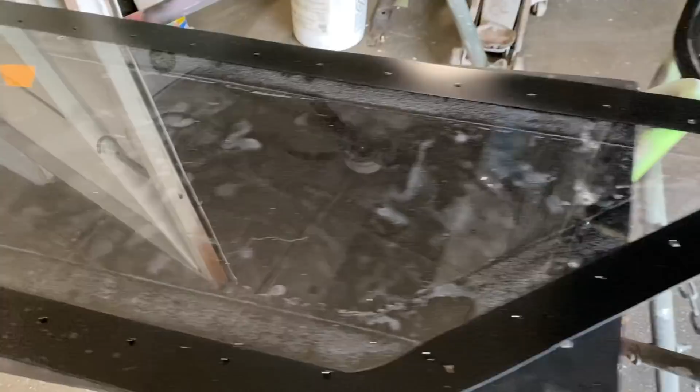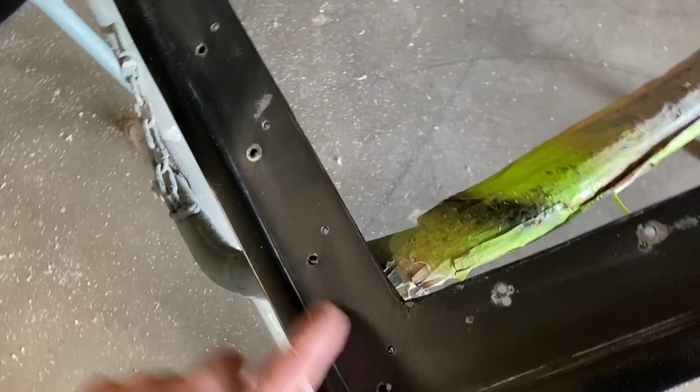Check it out. Last time you saw these doors, I had the glass in it. These were the ones in there down below, and you can see they were painted, so we had some plexiglass. I spent the other night taking all these out - basically they just screw right into the door. So we unscrewed them, got the new plexiglass that's nice and clear, molded it to the door, got it to fit perfectly - well, semi-perfect. It's not exactly the same, but that's okay. You can see the ends down here, they go out, and this one right here is just going to stop.

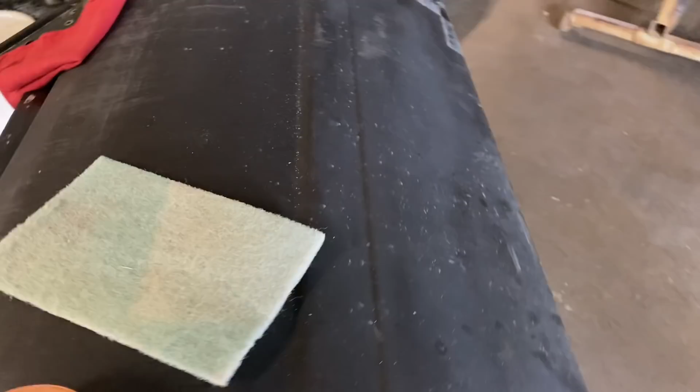These doors used to have a mirror on them at some point, it looks like. So we may end up putting a mirror back on it at some point, or either filling these in at a later time. But it is what it is - it's okay, not too bad.

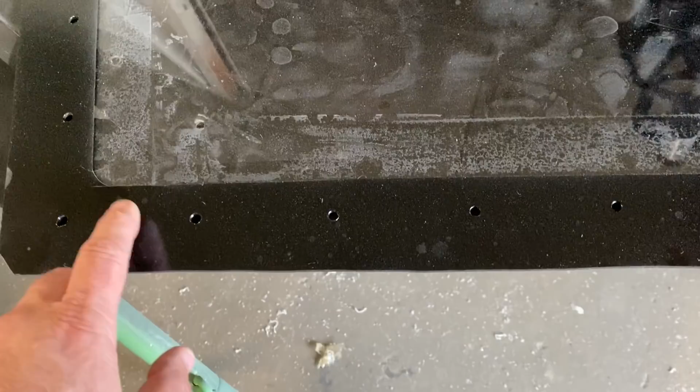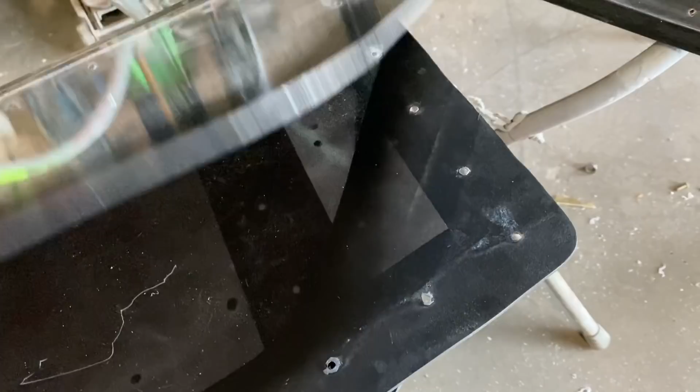So now today we're going to stick these windows in the doors. All we did on the plexiglass is mark it off - I had never done this before. This is the inside edge, so we marked off the inside, taped it up, put some paper on it, and spray painted the inside of it black. So when it goes in the car, you can see on this side it's nice and shiny, and it should hold up pretty good. My taping skills are not the best, but it'll look okay. So let's stick these things in the car and see how it turns out.

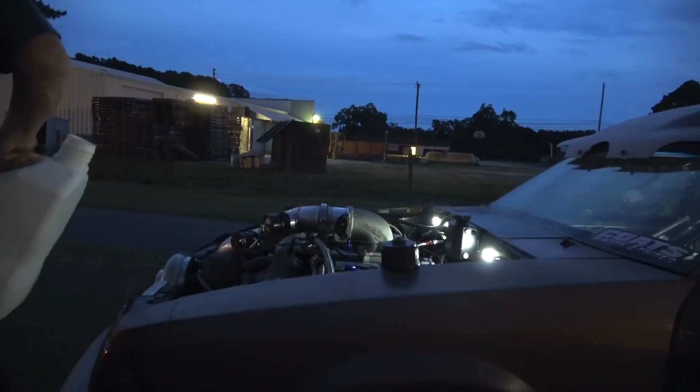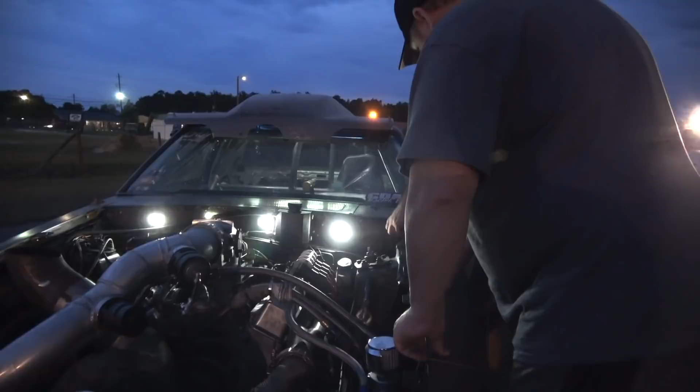Beat that lightning and that rain. It's gonna be a miracle. It's all right, we're here. It says we got about an hour according to AccuWeather - I don't know if that's accurate.

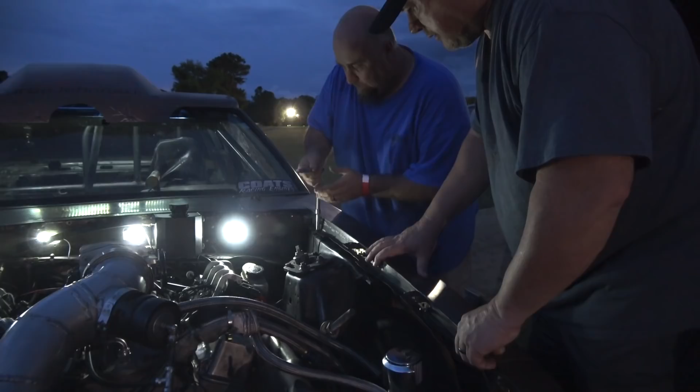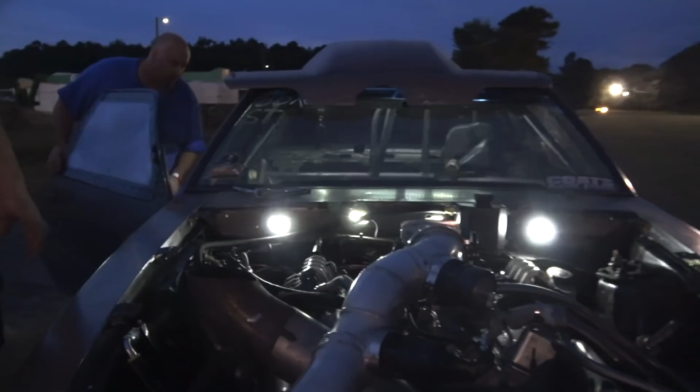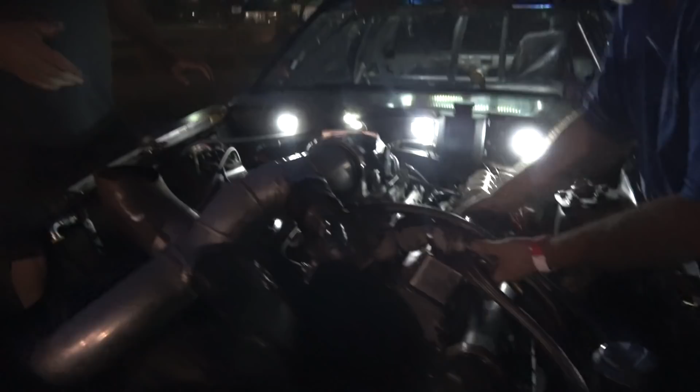What about the ones on the bottom? I don't even know where it is. They were up here, we're gonna have to find those. I'll find those. Boy, I hate being this late. It's all right. All this is good, I check - yeah, all this is good. Can't reach that, bro. Which one? The back one. It should be on, I mean I'm just telling you, I didn't check it. Oh, it's on. Yeah, we didn't take that.

Up here in stage lane, we're gonna get one pass. The tune-up is exactly like it was when we were at Piedmont last time, so I have no idea what it's gonna do. I think it went a 530 last time - that should have been like a 523, so we're lighter weight in the gear. Let's see what happens.

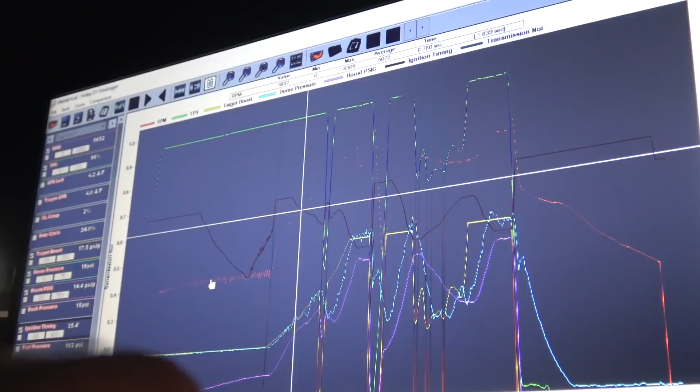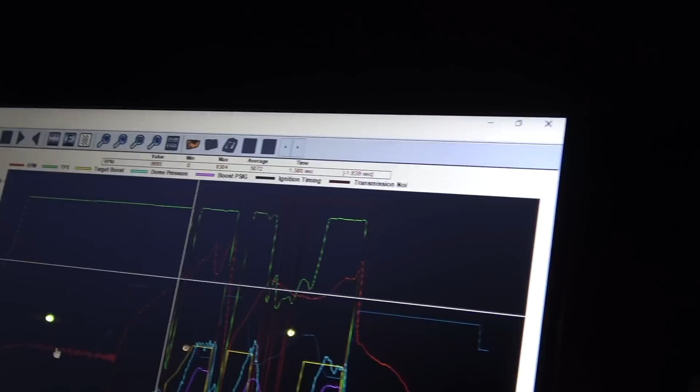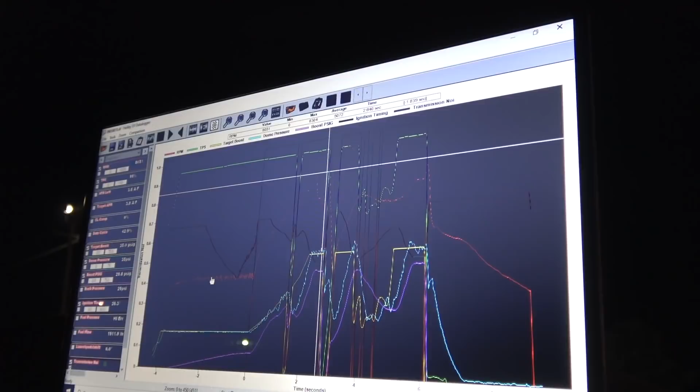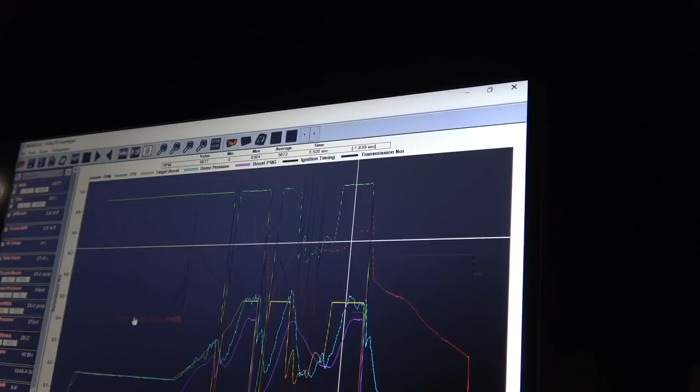Okay guys, that was a turtle - that was the exact same tune-up from Piedmont last time. 129 60-foot, I had to pedal it a couple times. 373, 562 at 133. The line is TPS, it left on 5.6 pounds of boost. Though what I was trying to accomplish definitely happened - the converter is tighter here, it flashed to 5400 and then started pulling up, that's exactly what I was hoping would happen. Right there, at 1.3 seconds into the run, I pedaled it - so I was past the 60-foot, went at 139. So right there where you usually blow them off is where it let go. That was at 18 pounds of boost at that point. We need to figure out how to make it get through there. Then I pedaled it again down track, 7,900 - I don't know if that spun or if I had left it in first gear there. I pedaled it out there and then eased back about on it. At the 60-foot you kind of kicked it out sideways a little bit, then it got up, you saved it from getting out of the groove, and right when you straightened back up the tires smoked out there - that's where you pedaled it. Okay.

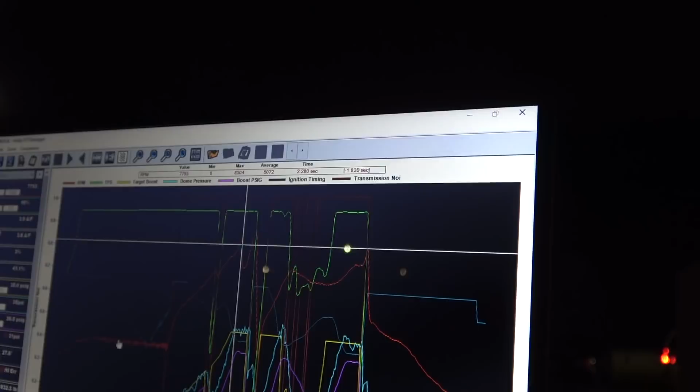And then right about there, it looks like it smoked them again. Yeah, okay, so this right up here, I did shift it. I shifted it right here, and that was at 2.2 seconds into the run. 8,000 RPM, it fell back to 6,900, and it knocked the tires off. And so that right there is where I pedaled it that second time.

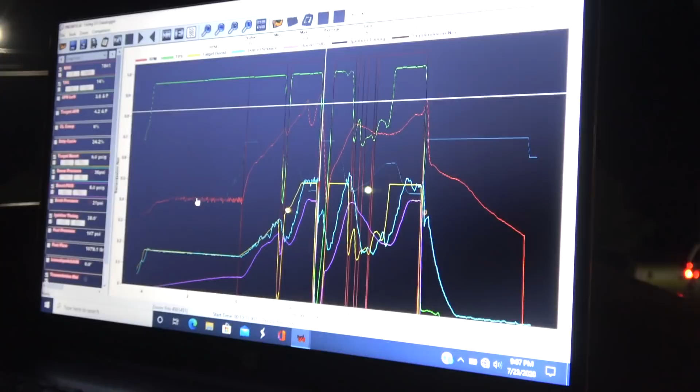That 10.8 PSI may not be the best thing. What do you want, 12? Yeah, we may need to go back up to 12 with it. 11 and a half? What were we at? We're at 13. How did the track feel up there? It's not sticky, it's not sticky. I mean, that ought to be the right air pressure.

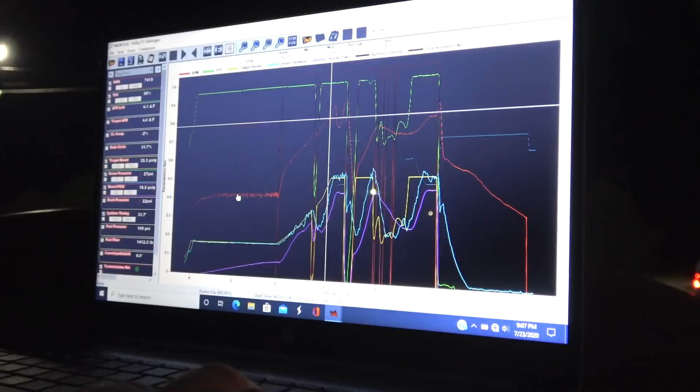What's that? 10.8? 10.8. Let's... yeah, we'll decide what we're going to do.

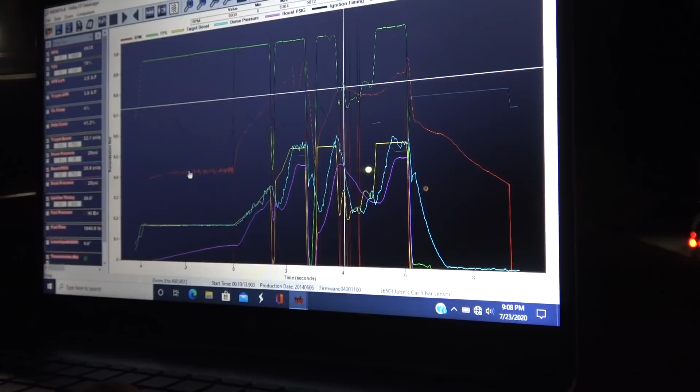Well, I don't even know if we're going to get to make another pass. We need to look at the weather. It's lightning around us like crazy. So we got to make some changes.

Okay guys, I think I'm going to have to change my bar angles again. This thing is separating pretty violent. So the anti-squat is definitely more than 100%, and I think it's planting the tire too hard. It went on out there pretty fast, 1.29, 60 foot. You could hear the tires, they're just hollering. Now this thing is a little bit nose heavy.

Now I ended up turning the boost down. I had it on 35 pounds of dome pressure at a 3-second ramp. So now I think it's at like a 2-second ramp for 25 pounds, and I'm leaving harder, so I'm gonna try to stick the tire. We got 11 pounds of air pressure, I don't know if that's right or not.

Randy also got up under there, last minute decision. We tightened the rebound, tightened the extension 4 clicks, and we'll see what that does. That should make it so that it separates a little bit slower and hopefully does not hit the tire as hard. It's still going to try to separate though. So I think what I'm going to end up probably having to do is this thing's going to have to go back to a bar angle that is less than 100%. So hopefully it works out good. I don't know, we'll see. Check it out.

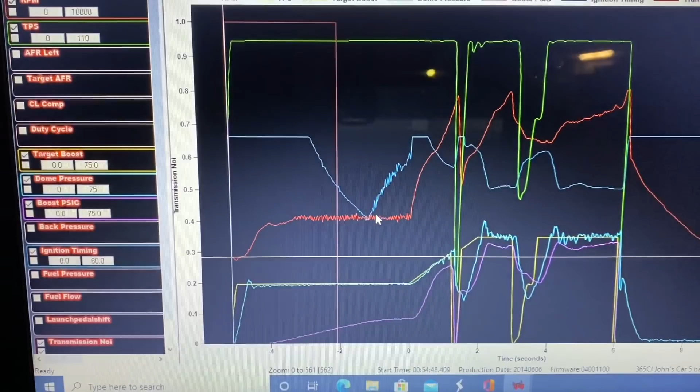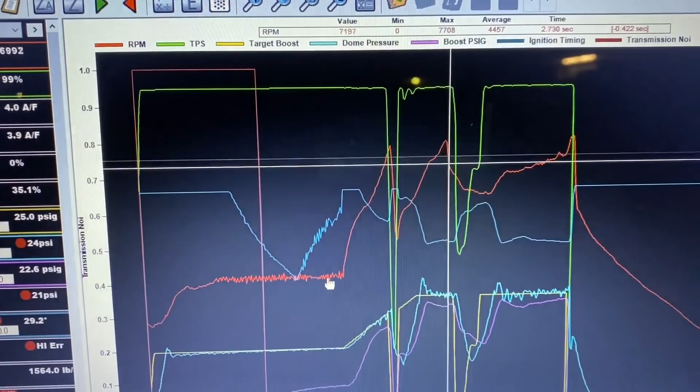Okay, so here's the data log from that pass. It didn't really work. I mean, it took off, had a 1.32, 60 foot, and I got out there and spun. That was spun at 1.10, is where I let go, to when I actually lifted. So that tried to lift too hard, and then I got out there and pedaled it and eased back on the throttle out there down track. Turned the boost down, it made 23.5, 23.6 pounds of boost. So that was 138 mile per hour. So that's not terrible, I mean mile per hour wise, for that boost.

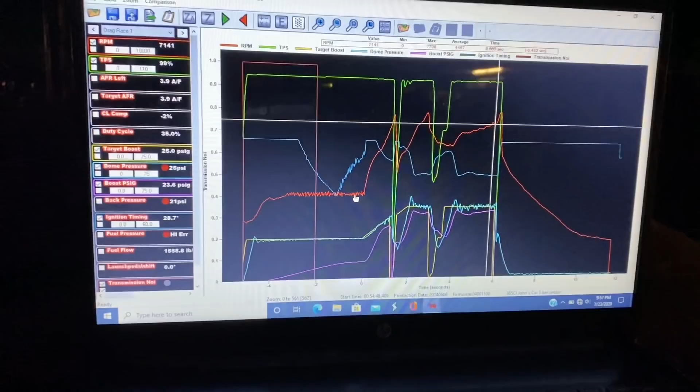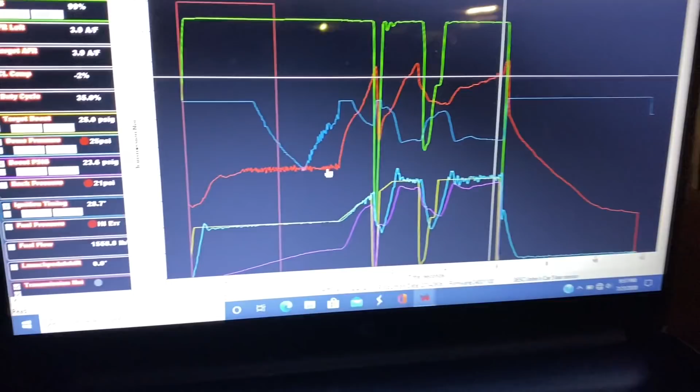So we got a bunch of work to do. I think we might have time to get one more pass in. It was lightning all around us, and we ran through a bunch of rain on the way here. But we might have a chance to get one more in. So we're gonna go up there and I'm gonna put 35 pounds of dome pressure on it, way down track at like 3.5 seconds into the run, and we'll see if it's able to take that or not.

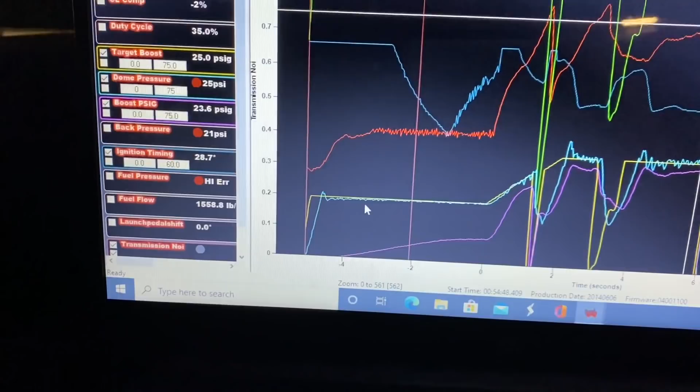I still don't know. Oh, never mind, it's raining. I just felt raindrops.

Do that? How fast y'all go? I said, how fast y'all go? Oh, 20s, that's fine. Jason Tyson, he's got the big stacker over there with the $150,000 race car in it.